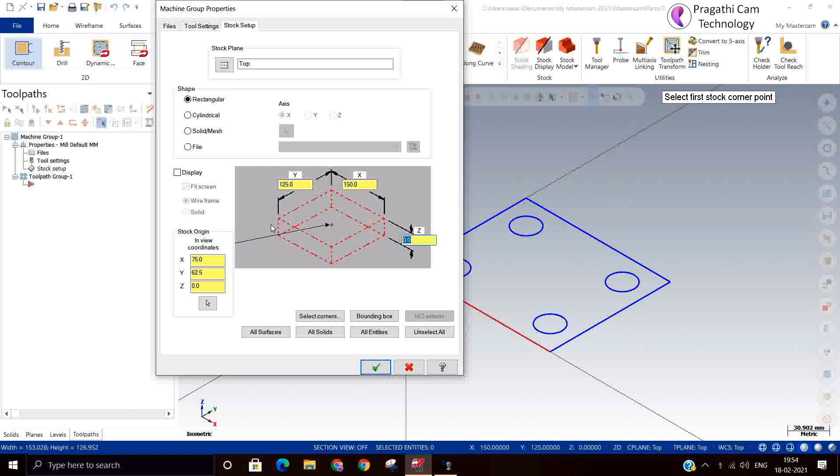So I will select the machine. I will define a stock. I will select from the corners and for thickness I will give 50 mm. I can switch on the visibility display. So this is our model.

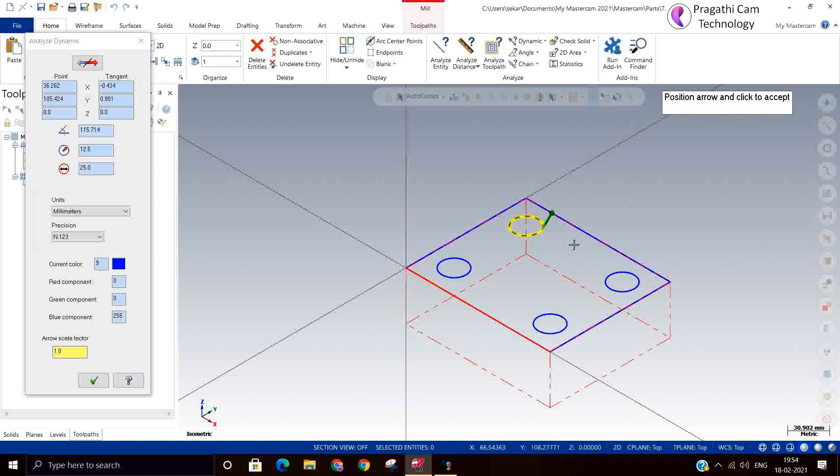Now here I need to make the hole. I just check what is the size of the hole. This is a 25 dia hole. Like this, 4 holes I need to machine. All 4 are the same size. So I just wanted to drill this.

Now I'll go in toolpath, drill. So directly go on to pick the center point. It should select the center point, then only it is correct. Otherwise, sometimes unknowingly the quadrant may be selected. So be careful. You can modify the cutting order, the pattern of cutting. Now we'll accept whatever it is.

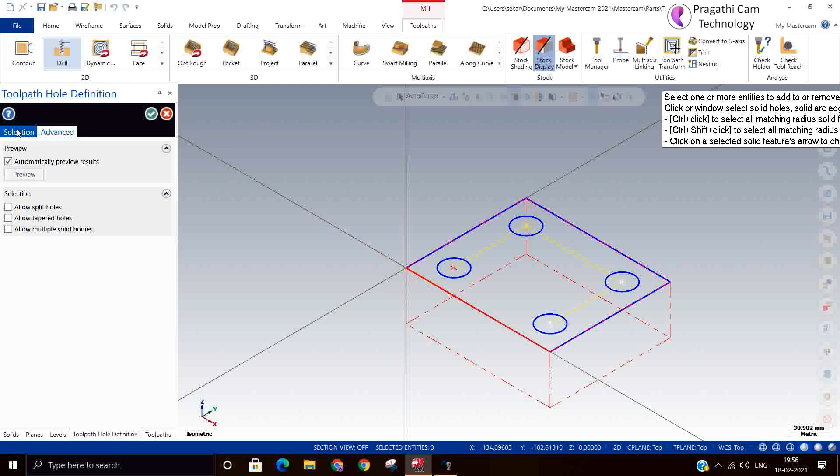So if there is a split hole, tapered hole, that also you can identify. So now at the beginning, we'll just accept these 4 holes.

First of all, at the beginning, you need to do the center drill. So the first operation should be a center drill. If you don't do the center drill and directly drill, there may be chances the drill will break. It's not fair to use directly 25 dia and drill. That is also unfair. There may be intermediate drilling also to be done. So still, if you want, do first a center bit, then 10 drill, then 16 drill, then you have to do the 25 drill. So like this you need to go step by step.

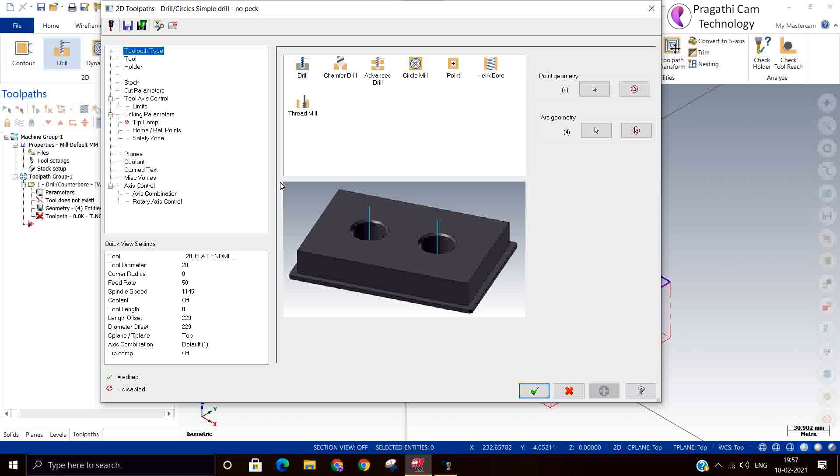So if you see the drill center point, there is a chisel edge at the center. So for making the seating of that chisel edge, you need to put the center bit. That's the reason. Suppose you are machining aluminum, a soft material, you can say you don't need the center bit. But the better practice is you make the center drill, then go for the machining.

So the first drill we are going to take now is a center bit. Filter none, I select center drill. Oh, no center drill available in the library. I can make it my own. Right click on create tool. So now we'll make one center bit.

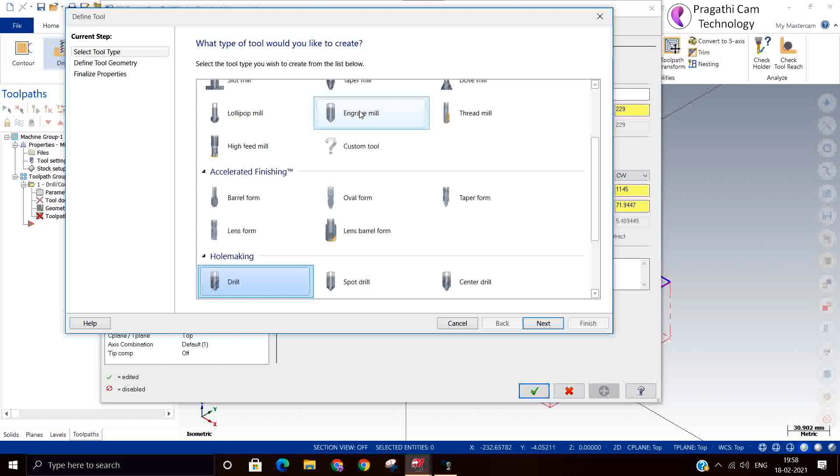Okay, next we can modify the shank diameter, drill diameter. So you can accept whatever it is. And always the CS for the center bit, don't give much, don't give more than 20, and feed rate also keep very less.

Because here the tool is directly plunging on the material, it's better you should have a lesser feed rate, and spindle speed also normal. I'll make it 1000 RPM. Feed rate I keep 120. This main function is to make the chisel edge of a drill seating.

So we'll use only the first option called G81 cycle. You can see all options are there: peck drilling, chip break, tapping, boring. All the options are available here. By selecting, you can change the G code. Some machines, it depends on the machine, the G code may change. But in general, FANUC, what is going to come, that we are going to see.

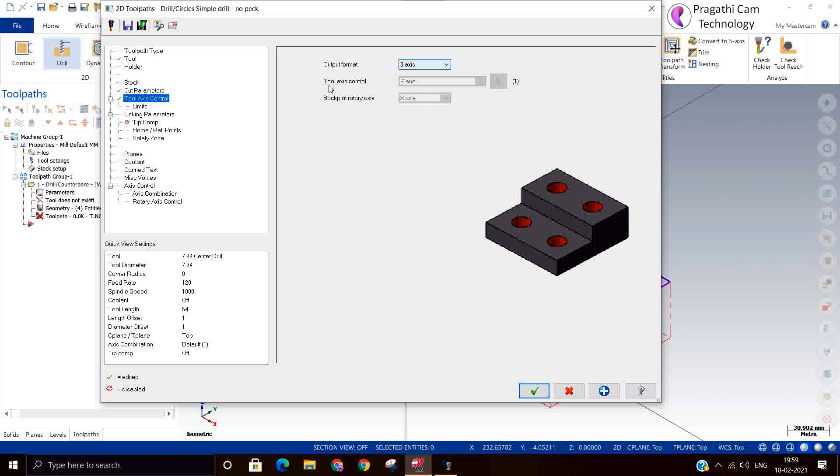So tool axis I select 3 axis. Now I'll say absolute and the depth minus 2 mm. Here also keep absolute. Top of stock also 0.

We don't want subprogram here, we are not switching it on. So now people are not using the subprogram. Tip compensation in this case is not necessary here. The tip compensation will be used when there is a hole open, meaning the drill is going below the stock material, below the stock. So its opening is there.

Then I just switch on the coolant. Now we have made the center bit. If you feel the retraction is too much, you can make it use the clearance plane only for the start of operation. Now you can see that 10 mm only it retracts and goes to the next operation.

You can check by analyzing, you can go back plot. So this is the center bit.

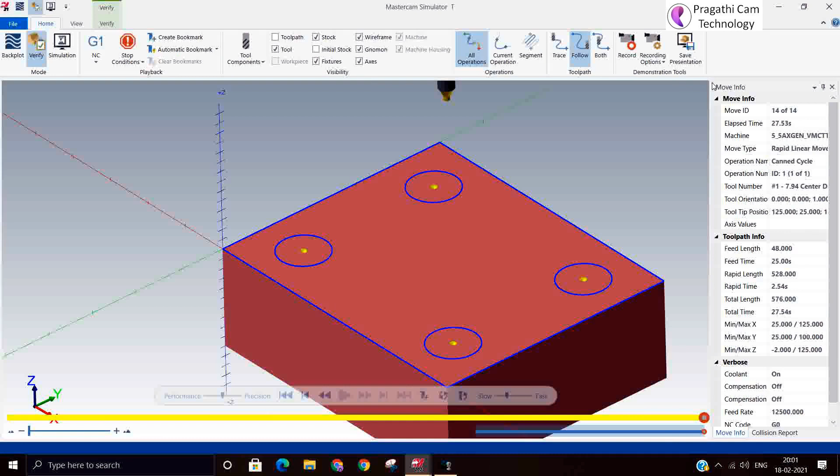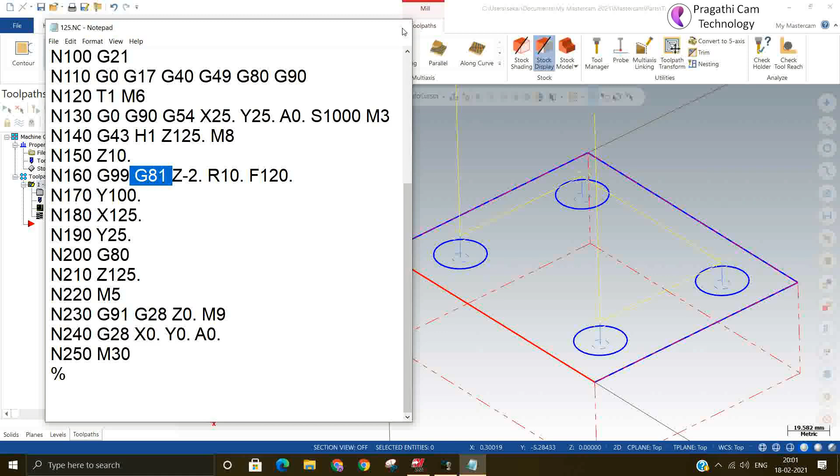If you generate the G code, it will show G81, and at the end it should show G80, meaning cancelling of the drilling cycle. You can see G81, and at the end there is a G80. It's a simple drilling cycle. G81 is the simple drilling cycle.

If you want G82, you can add a dwell here. If you add a dwell, then you will get the G82. What is dwell? It goes to the depth and stops for a second, whatever second you are giving. By stopping there, it is rotating just like that, and because of that there will be chip breaking happening. Now we'll see what G code is coming because we switched on the dwell.

So you can see that this G code is G82. It is a simple drilling cycle with the dwell.

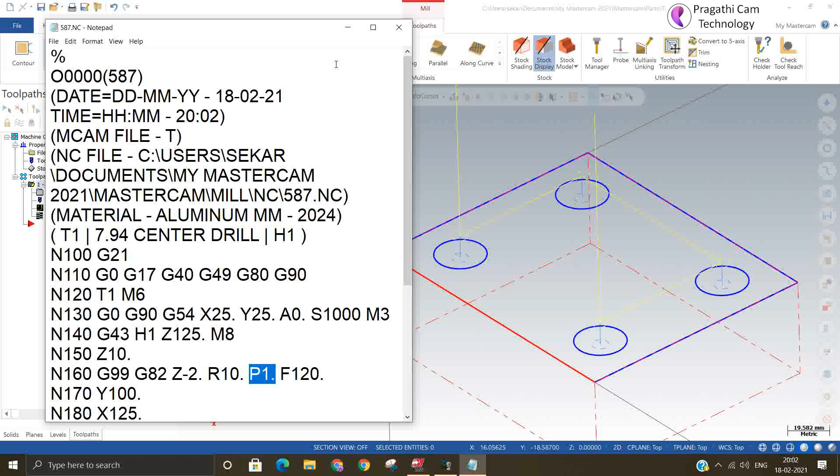In the first code the P1 was not there, so by this you are changing. Next operation I am going to do the entire depth, using the same geometry. Only thing is the diameter of the drill and the depth of the drill is going to change.

I'll just copy it and paste it. Now I'll change my path. Next tool I am taking a 10 diameter tool. I switch on filter, none, drill tool.

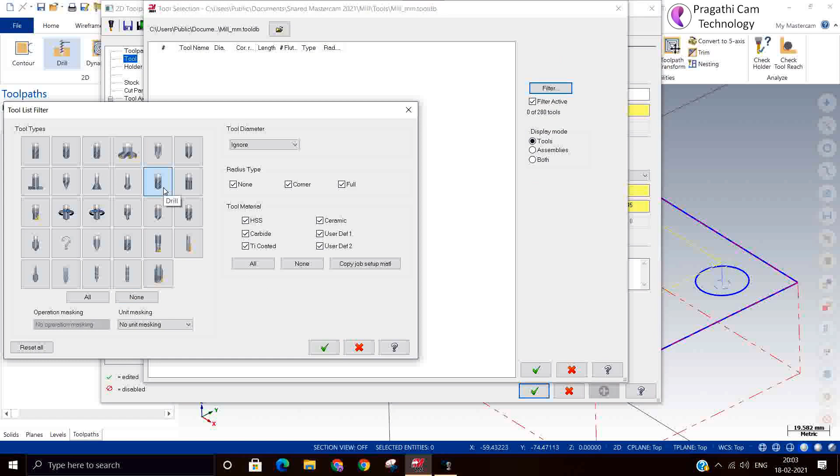Now for the 10 tool I'll take solid carbide. You can change the tool number here, and here you can give a little more also. Based on your machine you can modify this feed rate and spindle speed, so I will modify here.

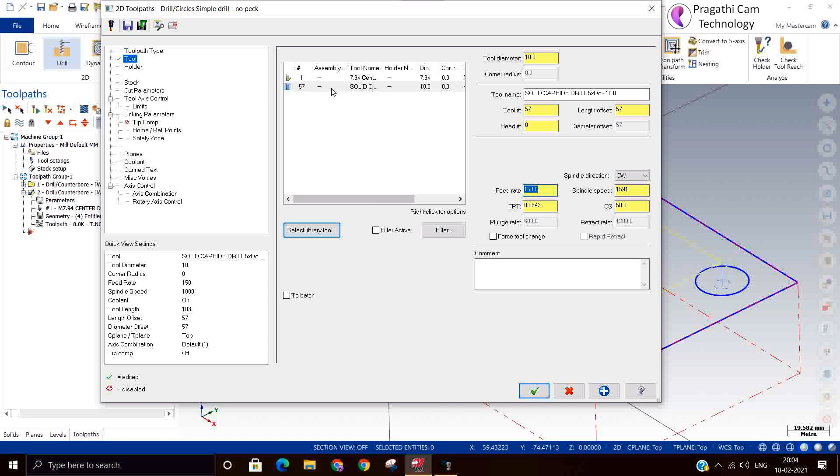So tool number is 2. I will change the drilling method to peck drilling. First peck 5 mm or 4 mm. Total depth is minus.

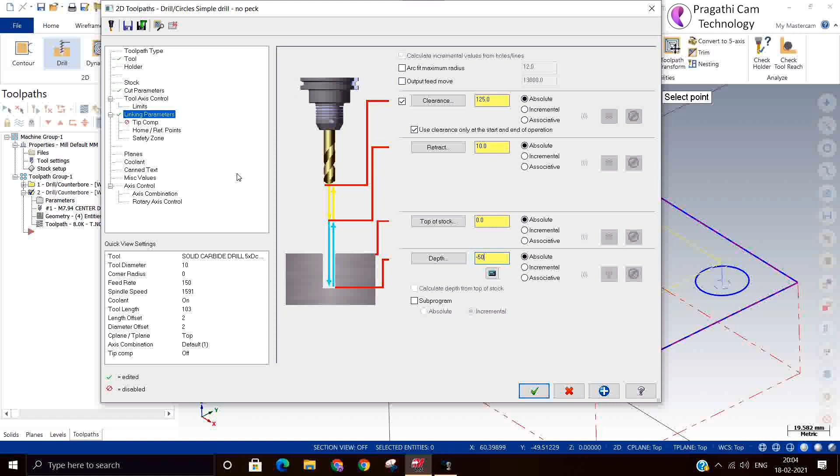You can pick also if it's not picked up; if it is solid, it will pick up. I will give minus 50, and I'm putting approximately. Let me see if there is anything that goes away.

Then you can switch on tip compensation. Whatever the 118 degree, what is the depth, that it will directly calculate and give. I just switch on coolant as well, and I regenerate, so you can see here.

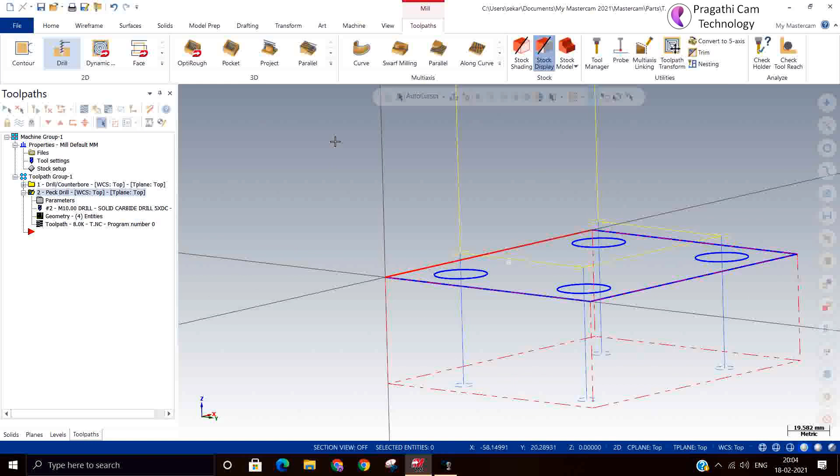You can see in the front view that the drill has gone down. Still, if you want more, it has to move further. You can modify here, or you can change this.

You can make it 1 mm or 0.5 in that place. Okay, you can regenerate. So now you can check by backplot.

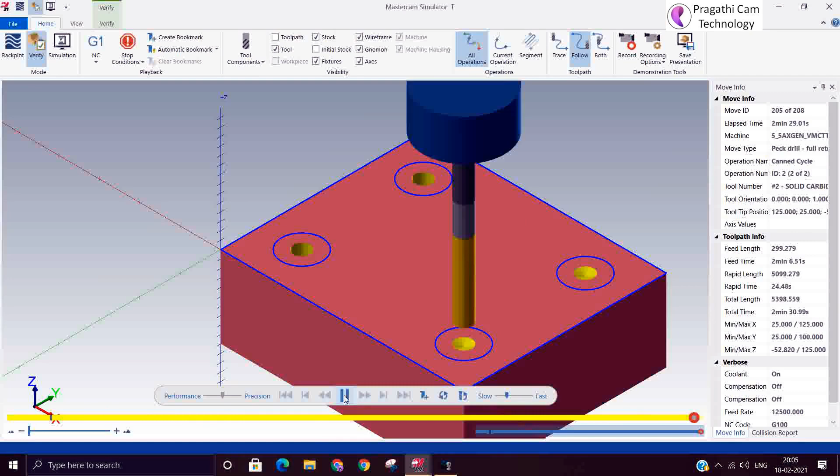So this is the first step, drill diameter 10. Next tool you can select. Suppose if you have a U drill, directly you can put the U drill in this, no need to go for one more intermediate step. But if you have solid carbide or HSS, it's better to go for a next tool.

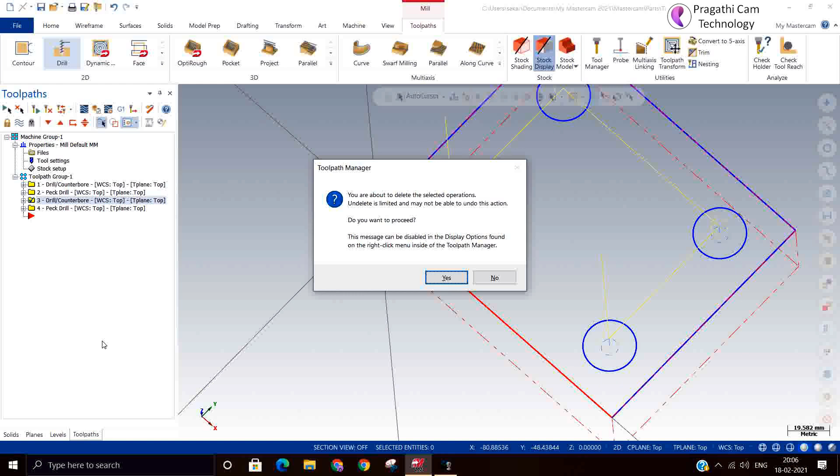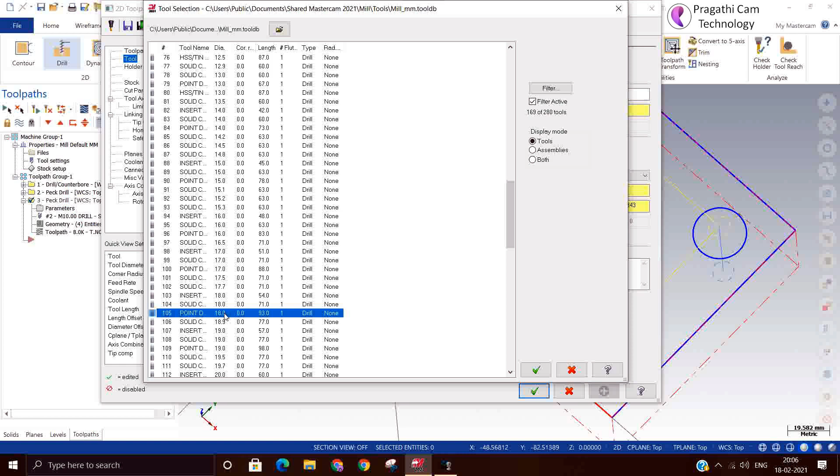Just I copied and paste, and I will modify. I copied both, okay, I deleted one. Now I will modify my tool diameter, a filter, now I will select 18. Okay, I took an 18 tool. This is tool number 3.

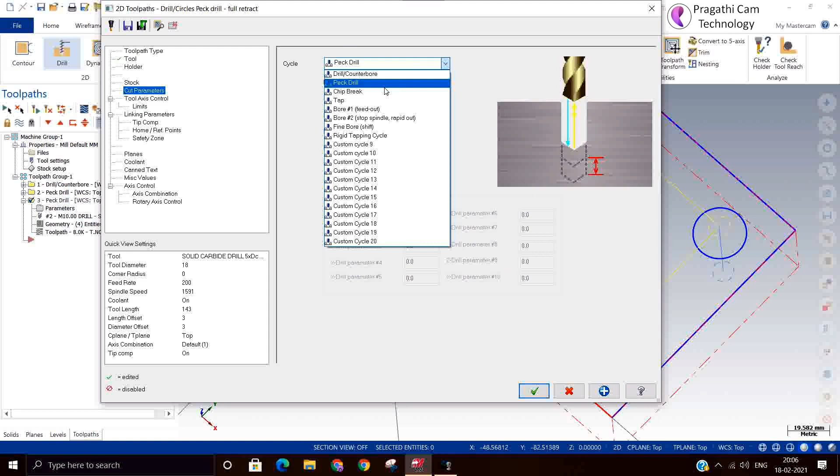By default I am accepting this; if you want, you can modify, nothing wrong. Remaining parameters and other things I am not changing, but if you want, you can. We'll see what code is going to come for chip break, and then we'll just regenerate.

So now we'll check the G code for the second and third operation. We have already seen G81 and G82, so the next two should now be G83. The second one should have G83. Yes, you can see that's G83.

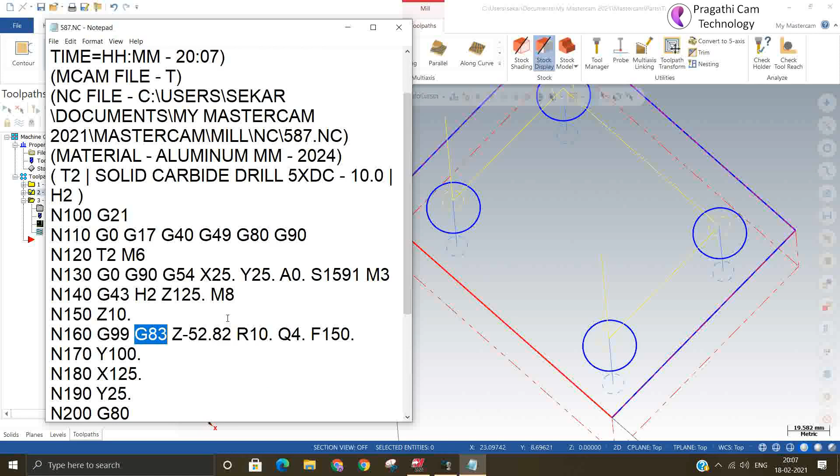Q in the sense is your first peck. So this is the G83. At the end, you can see all the operations. The G80 has to come, meaning the drilling cycle ends. This is a cycle on, and at the end there should be a G80. This is common in all drilling cycles; at the end there will always be a G80.

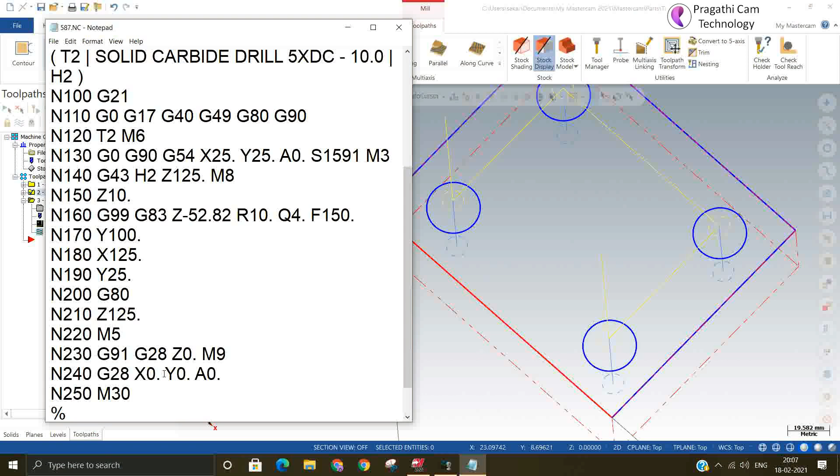Okay, we modified this chip break here. What is the code here? Just we'll check it. So this is the G73 cycle. Chip break is nothing but the G73 cycle.

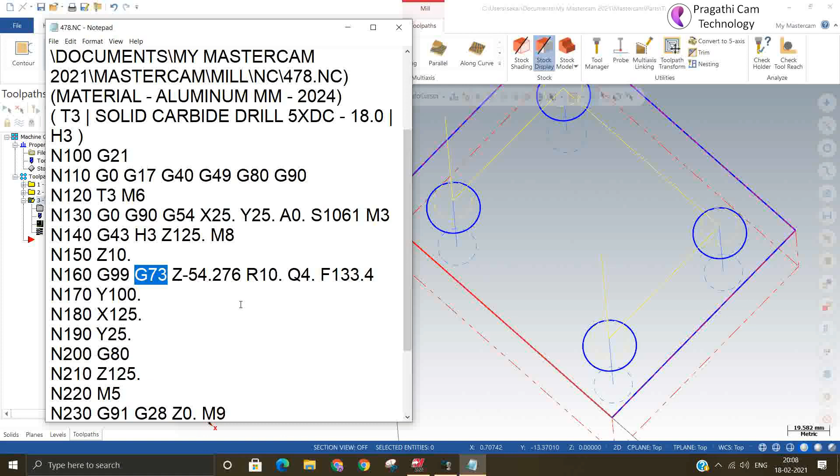This is all related to FANUC only; it may differ from control to control. That comes under post processor customization. So if your machine doesn't accept G83 and some other code is there, then your post processor has to be customized and used. Suppose you have Heidenhain control or Siemens control, your drilling cycle will naturally be different, so in that situation you need to customize your post processor.

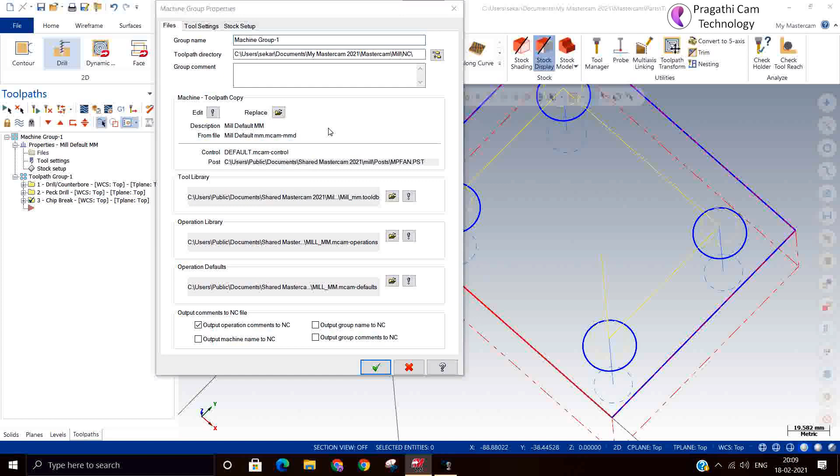Let me see if I have any post processor here. Now we have made it around 20, 18, no? Yes, then we can copy it and we make it a diameter, only we need to change that.

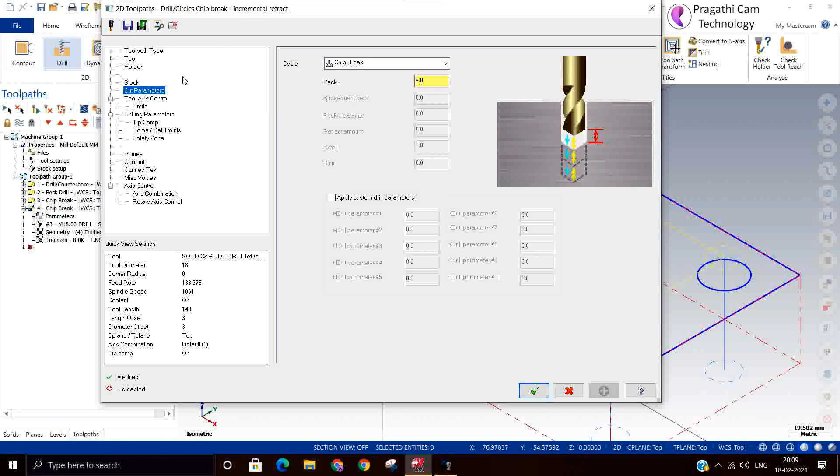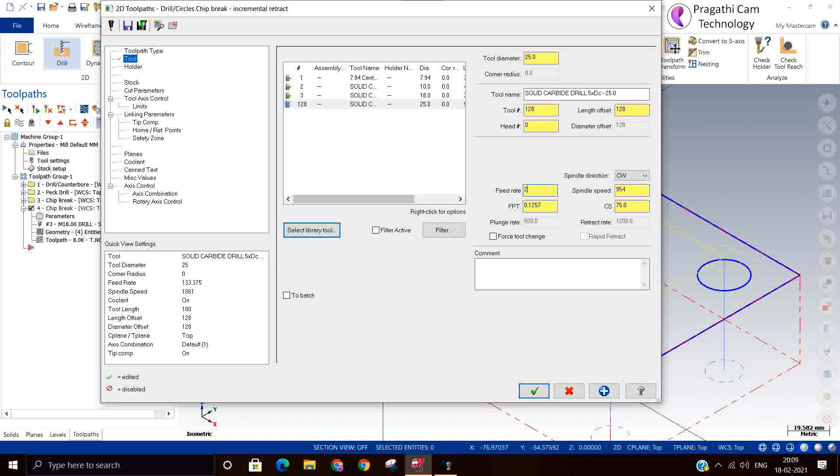This is the procedure how to do the drilling operation that I tried to explain here. So you change the tool number, feed rate and plunge rate. Now we can select all and verify.

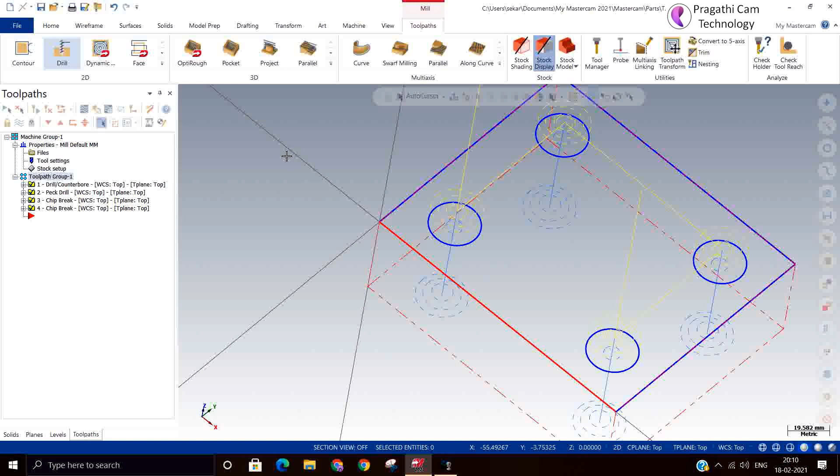So this is the drilling operation. We have now seen in general how to make the drilling operation and what the general drilling cycle is all about. Where to start, how to start, and how to end the drilling, I just tried to explain to you. Thank you.